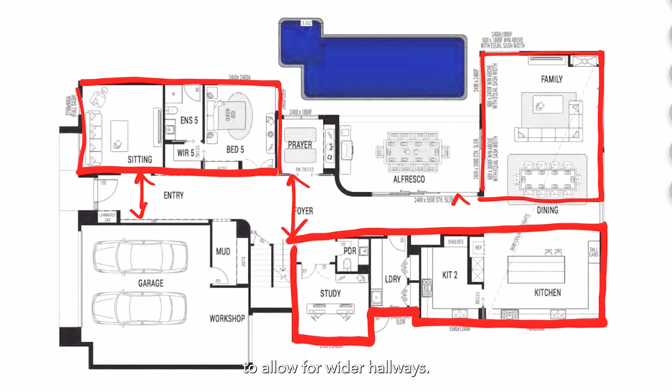The overall circulation is wasteful and the stairs are taking up valuable width on the southern side of the plan. The central courtyard does not benefit the primary living spaces. All the light and natural ventilation is being hogged by the prayer room.

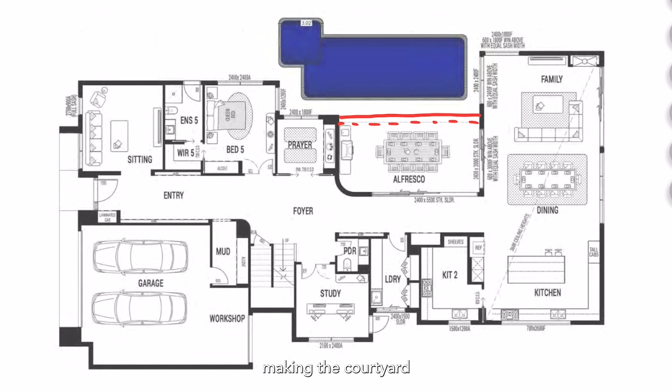Additionally, the second story hangs over the courtyard by almost 4 metres, therefore actually making the courtyard an undercroft. The primary living spaces can't enjoy access to the outside, as on one side the pool acts as a blockade, and on the other side there's just a single set of doors in the corner to access the backyard.

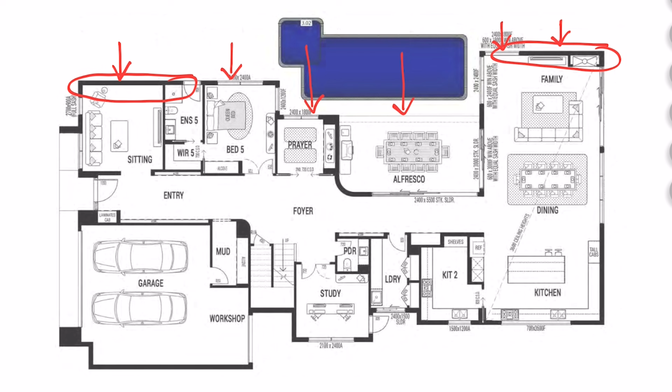The north side provides all the natural light benefit, yet there's a lack of windows to benefit the adjacent rooms. Additionally, the rooms are poorly allocated, as they've been given to rooms that are used infrequently. The ground floor currently stands at 308 square metres.

As we move upstairs, it's evident we face similar issues. The kids' bedrooms don't benefit from the northern aspect, or even the external windows, as much as they should. They are also small and very awkwardly shaped.

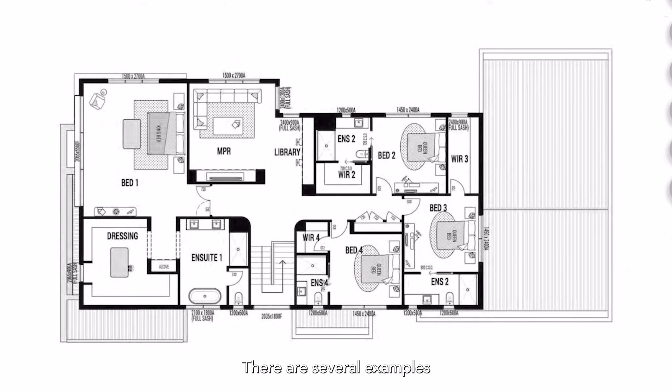There are several examples of suboptimal functionality. For example, in bedroom 2, you have to walk through the ensuite to get to the walk-in robe. The circulation is inefficient throughout the house. The first floor currently stands at 211 square metres.

It's easy to see the improvements we can make here that will not only improve the functionality of the home, but will reduce the floor space and therefore the overall cost of construction. Layout Revision 1, ground floor.

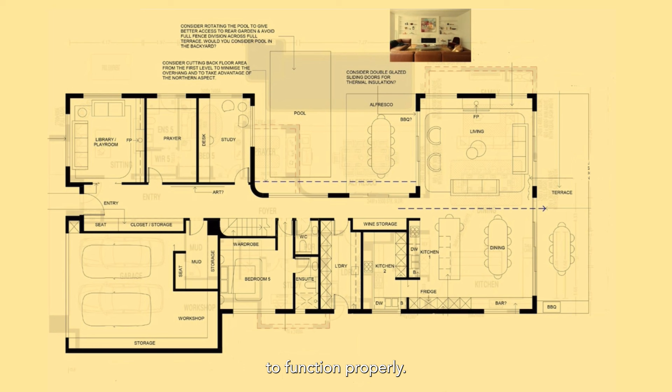The first thing I wanted to solve was how to give the facilities on the south side enough space to function properly. In order to do this, I've relocated and reoriented the stair to a single straight run close to the centre of the plan.

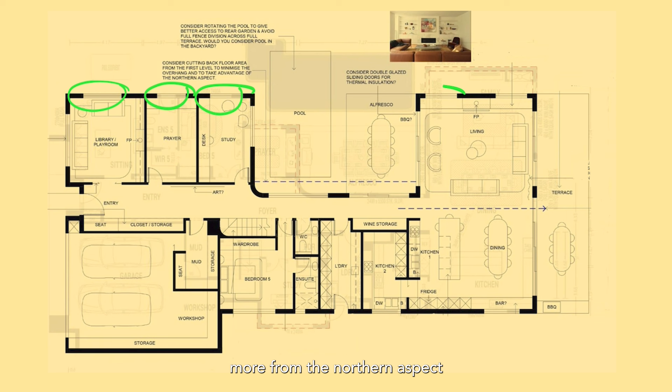This is very efficient and allows more breathing space across the kitchen and dining room. The laundry and second kitchen are consolidated into a strong utility zone adjacent to the kitchen. We worked the rooms on the northern side to benefit more from the northern aspect by giving them generous windows.

We've consolidated the more high-use rooms - the library, playroom, the prayer room and the study - along the northern side of the plan, and relocated bedroom 5, the guest bedroom, onto the southern side. We decreased the width of the corridor throughout, which also granted more space for the rooms on either side.

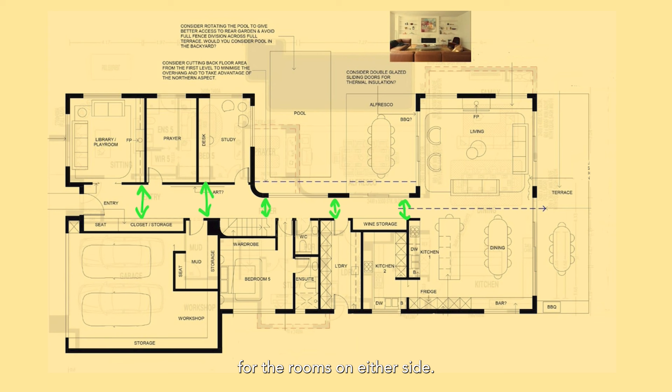We rotated the pool and alfresco terrace to give better access to the garden. The living room has been made wider and shorter, a better proportion, with clear and unobstructed access to both the alfresco central courtyard and the rear terrace. The entry is now supported with significant dump zone storage and seating.

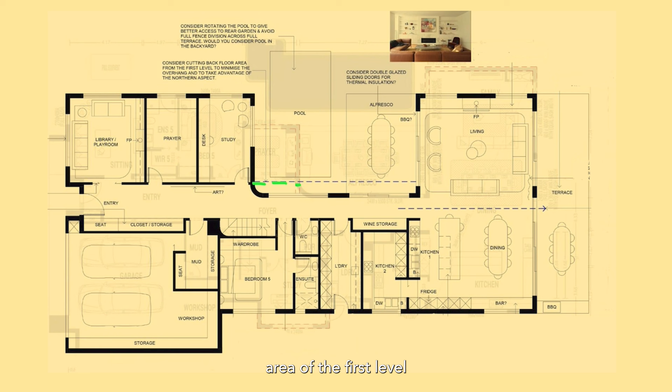We cut back the floor area of the first level to minimise the overhang and to take advantage of the northern aspect. We have reduced the floor space of the ground floor by 38 square metres.

Now moving upstairs to the first floor. We reduced the size of the primary bedroom and focused on ensuring it was well supported with his and her walk-in wardrobes and a generous ensuite.

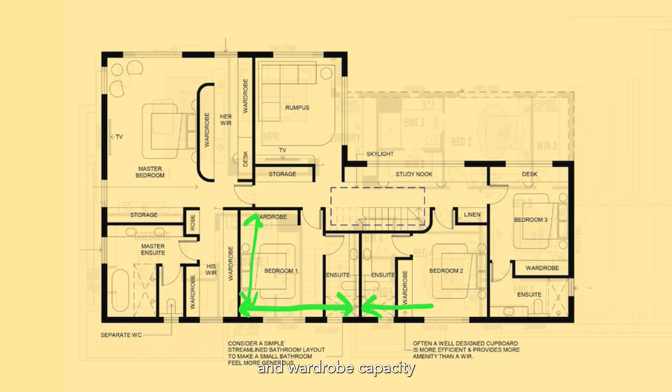We properly consolidated the bedrooms. Each bedroom, ensuite and wardrobe capacity was increased, and each room now has access to generous windows. The central stair and circulation corridor is flooded with light from a skylight above and the north-facing windows.

We split up the rumpus room and study facilities. We have reduced the floor space of the first floor by 31 square metres.

Within 2 weeks of signing up for our layout review, Hetal received our revisions. She made her own annotations to the plan and requested the following changes. On the ground floor, she wanted to switch the prayer room and the study location, as the prayer room will also double as a meditation and yoga room.

She also wanted to rotate the kitchen island to create a strong point of arrival, which I completely agree with. On the first floor, she preferred to have one big walk-in robe in the primary bedroom. Instead of a study nook, she wanted to have a desk in each kid's bedroom and a walk-in robe so that they could all hide their mess.

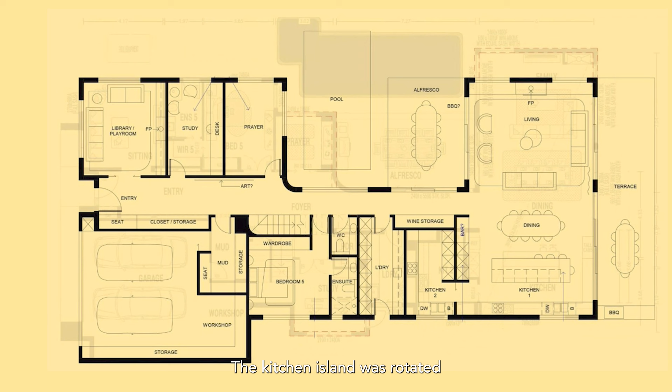Layout revision 2, ground floor. The kitchen island was rotated to provide a longer island and increase the tall utility support for the kitchen. The prayer room and the study locations were swapped to provide more natural light, ventilation and benefit to the prayer, yoga, meditation room. The ground floor now stands at 270 square metres.

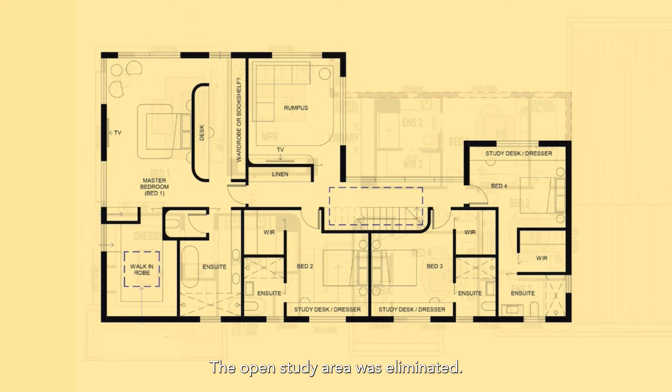Moving up to the first floor. The open study area was eliminated. All kids' bedrooms now have a walk-in closet and a study desk. The primary ensuite and walk-in robe locations were swapped and a private study was added to the primary bedroom. The first floor now stands at 180 square metres.

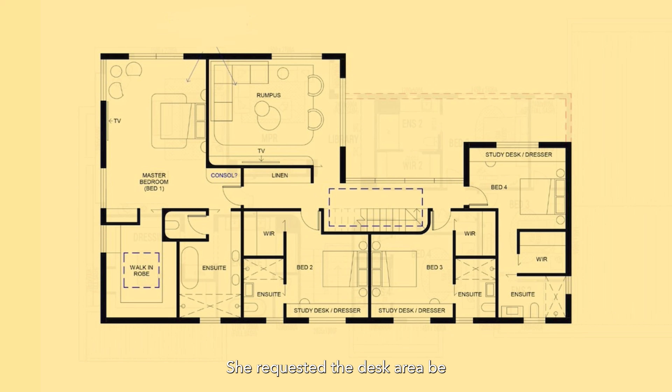We sent this revision off and received the following feedback. Final revision, ground floor, no change. Final ground floor area, 270 square metres. Moving up to the first floor, she requested the desk area be removed from the primary bedroom and the rumpus room enlarged. Final first floor area, 180 square metres.

You couldn't get a better example of the impact of efficient and effective planning. Due to the improvements we made, not only is the home incorporating more amenity, bigger rooms, better natural light and ventilation, we have achieved all of this within a smaller footprint.

The floor plan started at 520 square metres. Our final floor plan was 450 square metres. That's a 13.5% reduction to the total build, which equates to a bigger reduction in cost than you could ever achieve by changing your finishes.